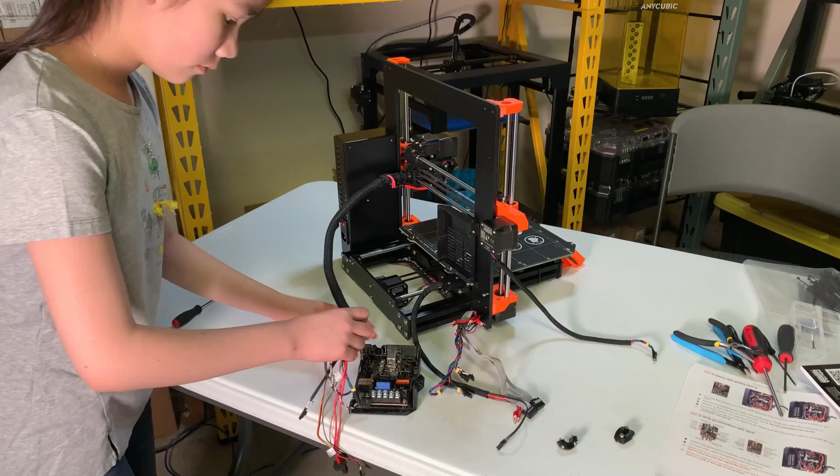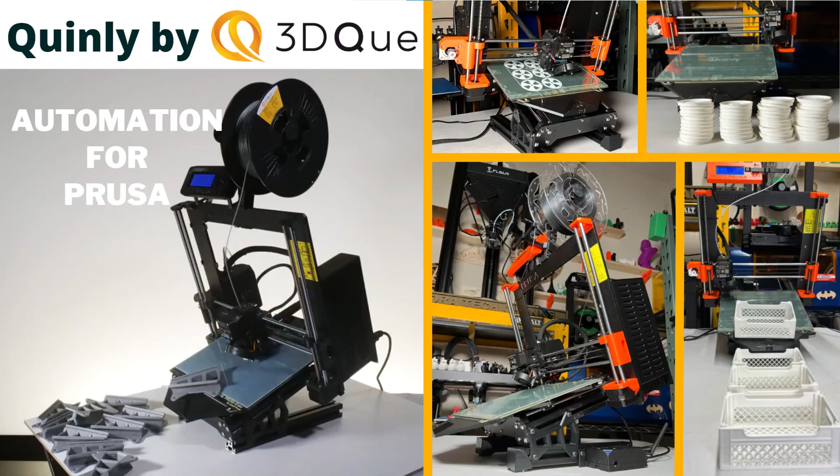About a year ago, I got my Prusa MK3S Plus, and since then, I haven't done any upgrades on the printer itself because of how well it prints. I only added a Raspberry Pi with OctoPi so that I could send prints directly from my computer.

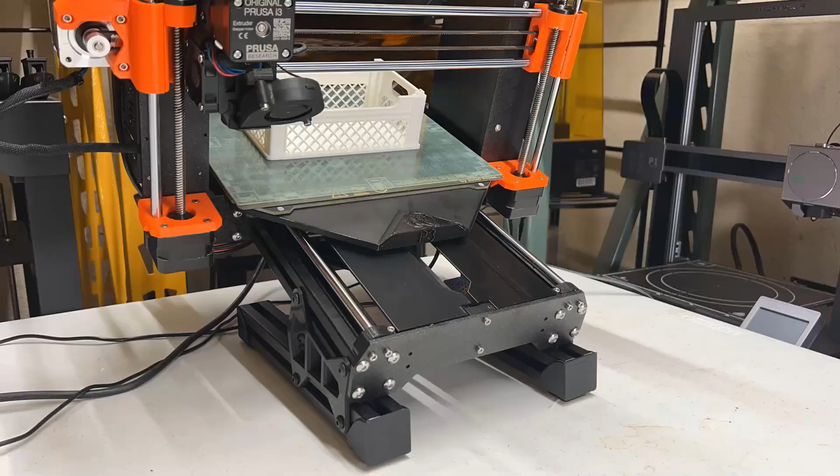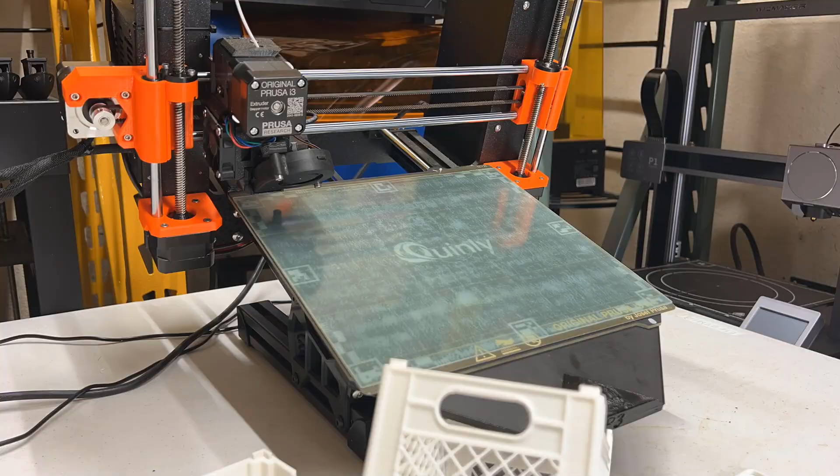Today, I will test out this Quinly Automation 3D Printing System kit from 3DQue on the Prusa MK3S series. This allows you to do batch printing, to eject parts when the print is finished, and to start a new one. You can control the print queue by changing the number of parts you need to print or adding more jobs to the queue. This kit also comes with an optional wireless hub in case you don't have a Raspberry Pi or you cannot get one in this chip shortage pandemic.

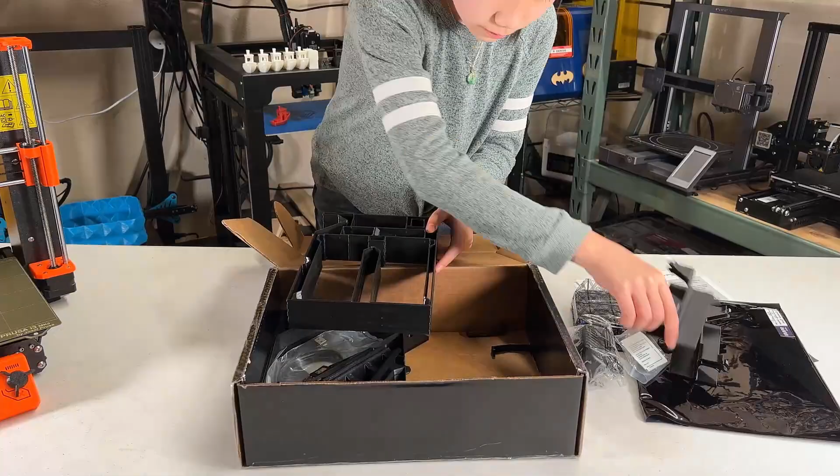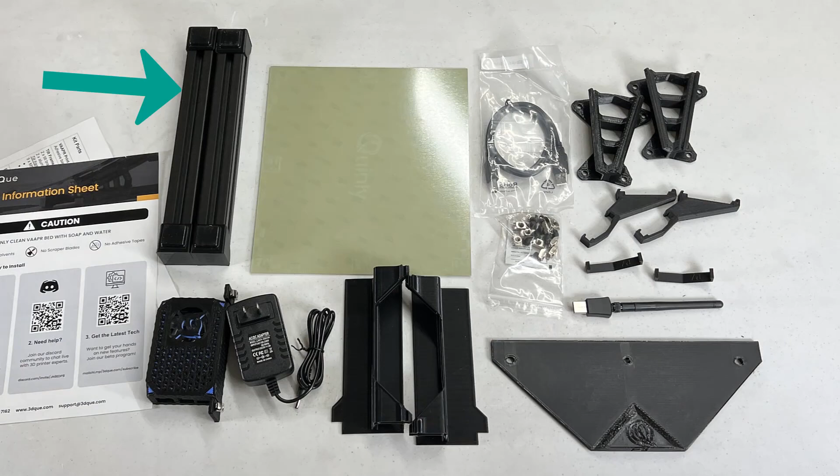We have two 30 by 30 aluminum extrusions, a VAAPR print surface, some 3D printed parts, a USB Wi-Fi adapter, the wireless hub, and the power supply.

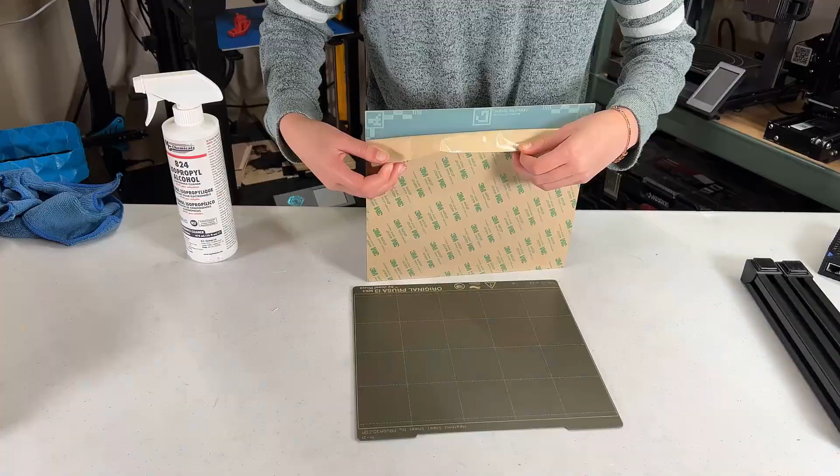First, I will clean my existing print surface as I need to stick the VAAPR print surface on top of it. However, don't use isopropyl alcohol on the VAAPR surface.

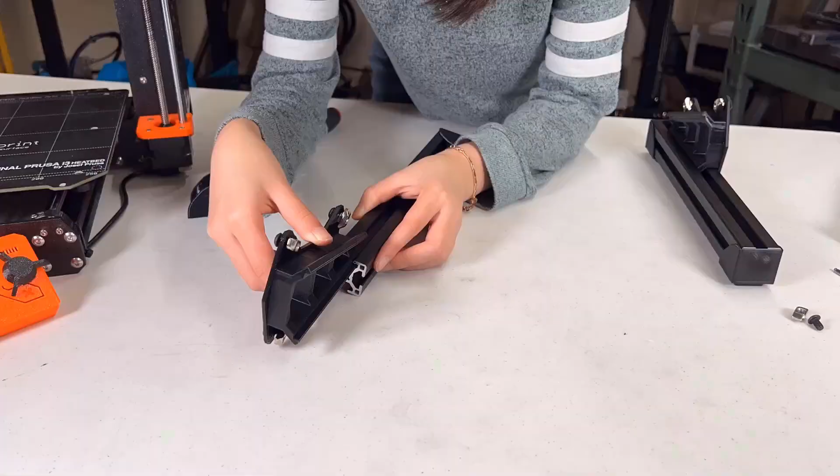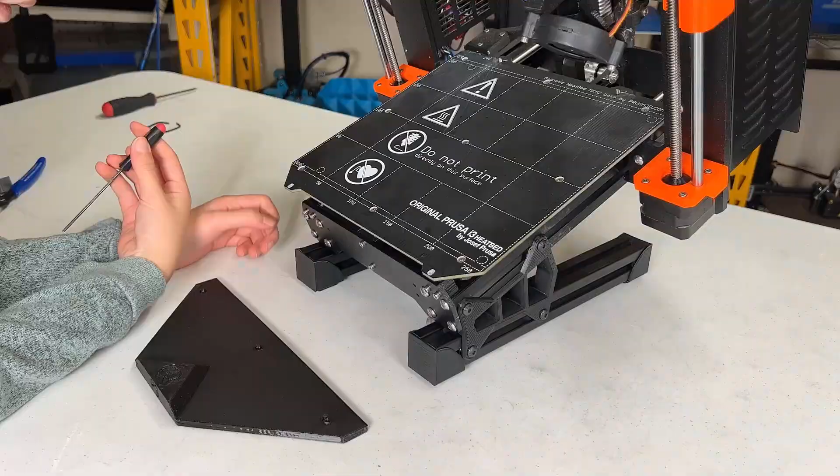Remove the filament holder and the LCD screen from the printer. Put the tilted mount on the extrusion and install one to each side so that your printer is now tilted. Install two covers to make sure no parts go underneath the heated bed. Add a slider using the spacer and screws of the heated bed.

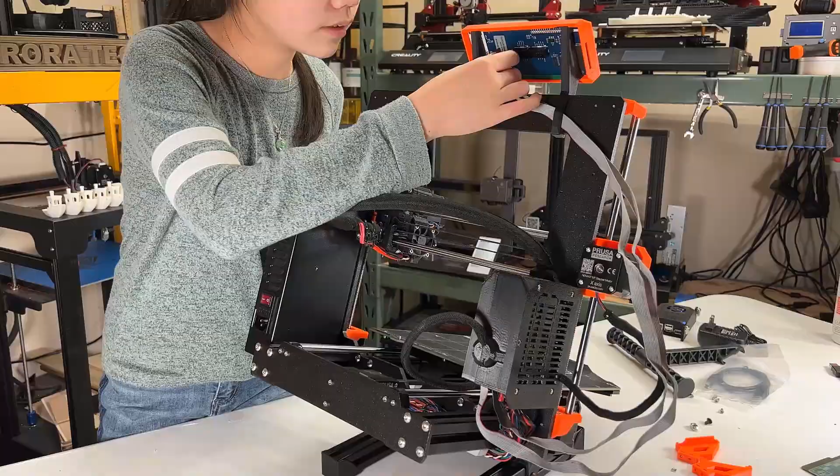Replace the support 3D printed parts of the LCD screen with the ones that came with this kit. Mount it on top of the frame, reconnect the cables, and use zip ties for some cable management.

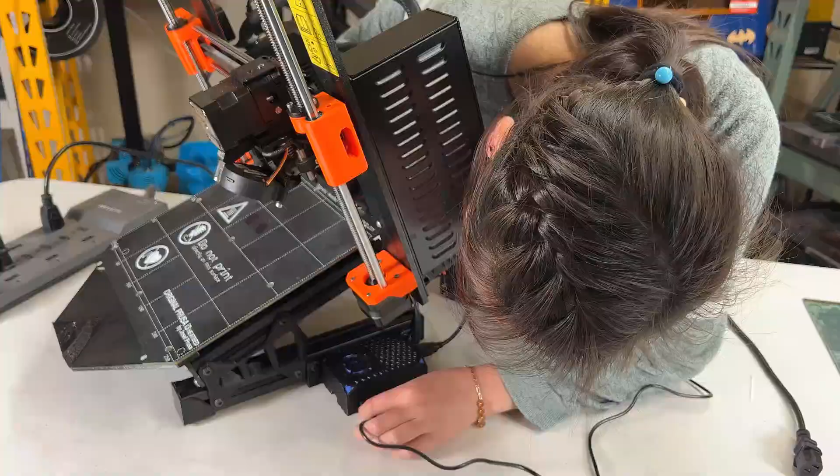Mount the wireless hub at the side of the printer and connect the USB cable from the hub to the printer. Connect the power cables, the USB webcam, and the USB Wi-Fi adapter, or if you have an Ethernet cable, using a wired network is always better. Now we can turn the printer on and the wireless hub on.

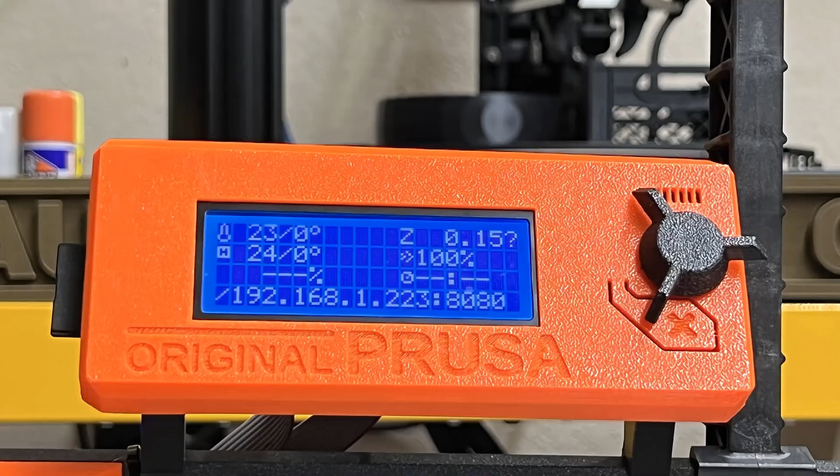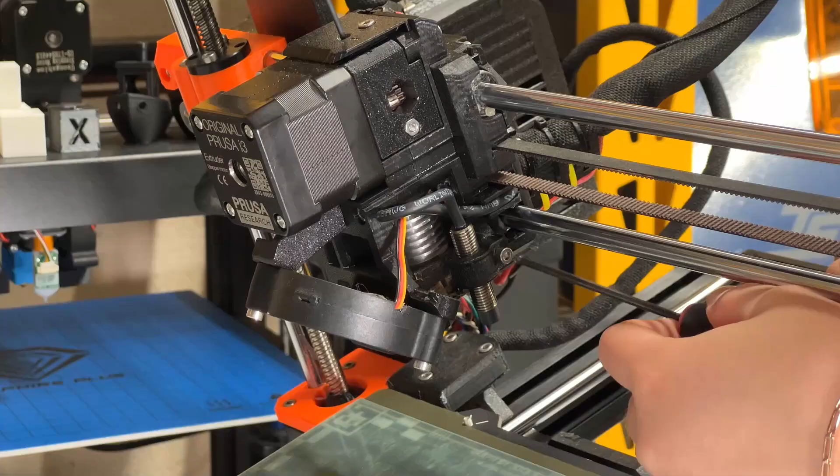After 8 to 10 minutes, the printer will show an IP address. We need to turn off two features in the settings menu: the crash detection and the Raspberry Pi port. We also need to adjust the Super Pinda sensor, making it 1 mm higher than the nozzle as recommended.

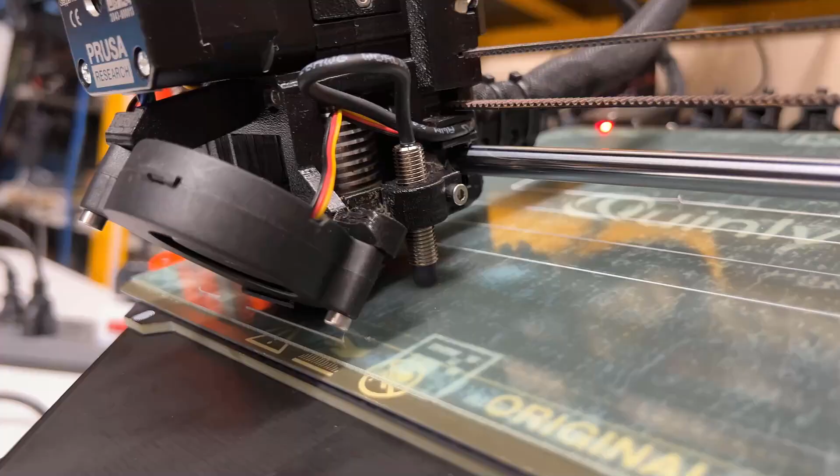Then redo the first layer calibration. Once you get the filament to stick to the print surface, we can go to the computer and make some changes to our slicer profile.

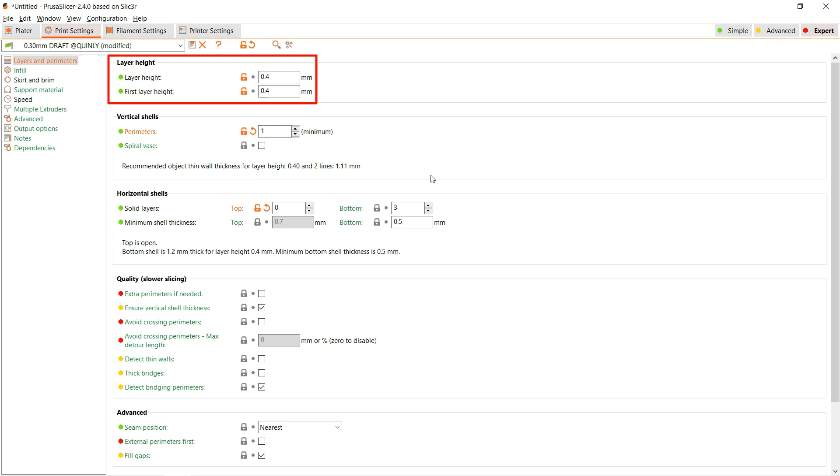First, for print settings, set a thicker first layer height, as we want a thicker first layer for better adhesion. For the layer height, you can just set it to your normal layer height like 0.2 or 0.3, but as I want to print faster for the test prints, I will just set it to 0.4.

I will add a few more loops to the skirt to clean up the nozzle, set the distance closer to the model we print, and set the height of the skirt to be taller so it can be removed easily along with the model. For filament settings, we need to increase the temperature by at least 10 degrees as the print surface is now thicker.

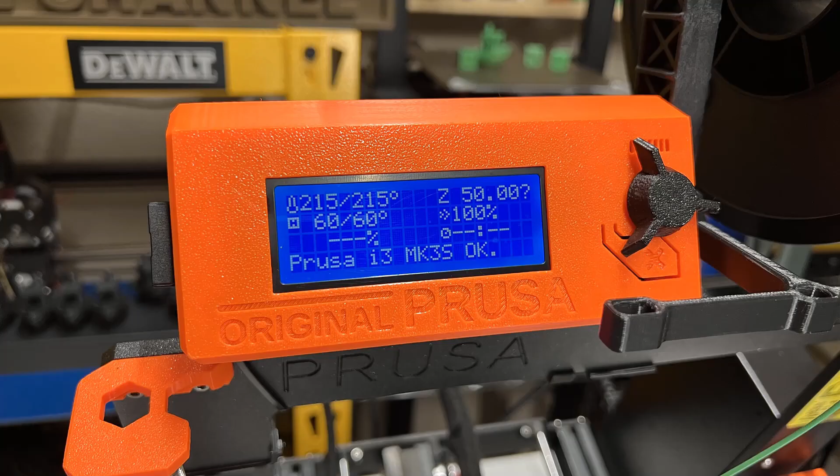The measurement from the thermistor under the bed closer to the heat source may not be the same as our print surface. For the printer settings, clear all the start and end G-code.

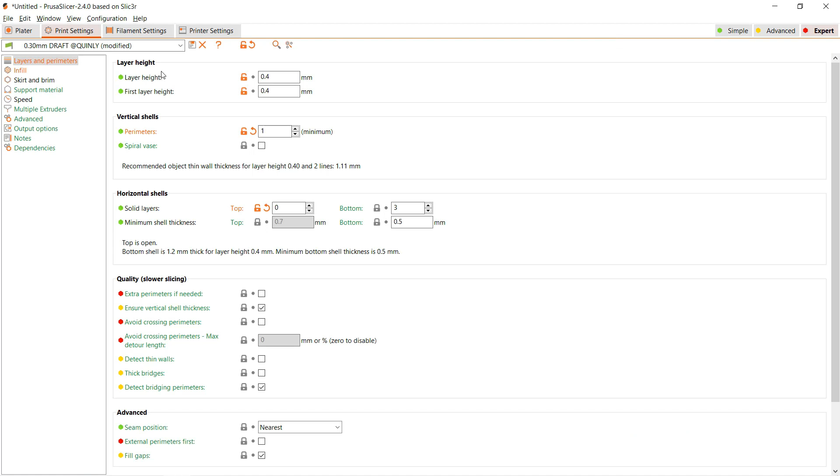Okay, that's all we need to change. Let's start with a simple cylinder. I will make it 20 mm tall and use vase mode to print the bottom and only one thin wall at the surface. Okay, export the G-code.

Open our browser and enter the IP address of the wireless hub. There are only 3 items in the navigation menu. The home is this page, which shows the current job, status, and the live stream of your webcam. The print queue is now empty, and the file manager is also empty.

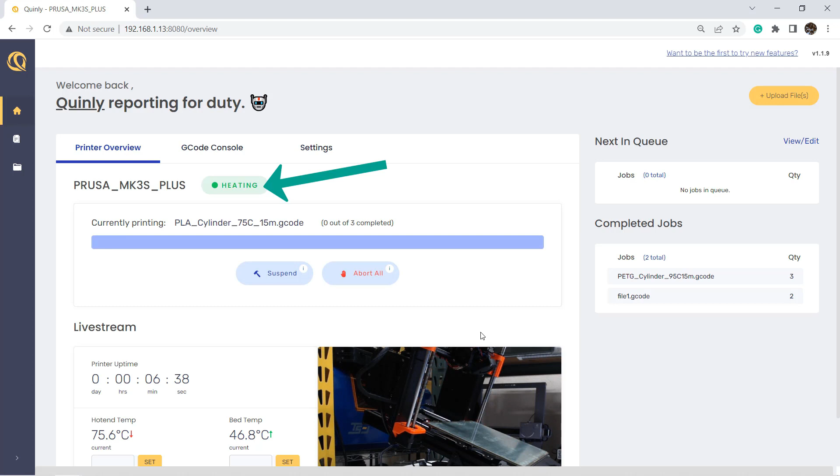Let's upload the file we need to print, wait a few seconds, and we can then add this file to the queue. Enter 3 as the quantity and 29 as the release temperature, and click Send to Queue. But since we have only one job, it has already been sent to the printer as the current print job, so we can't see it in the queue anymore. Let it heat up to the printing temperature, and it will start printing.

Now it's going to wait for the release temperature. It's showing resetting in the browser, and it won't do anything until the bed temperature drops below 29. Okay, it starts to release the part. The PLA cylinder will gently be pushed away.

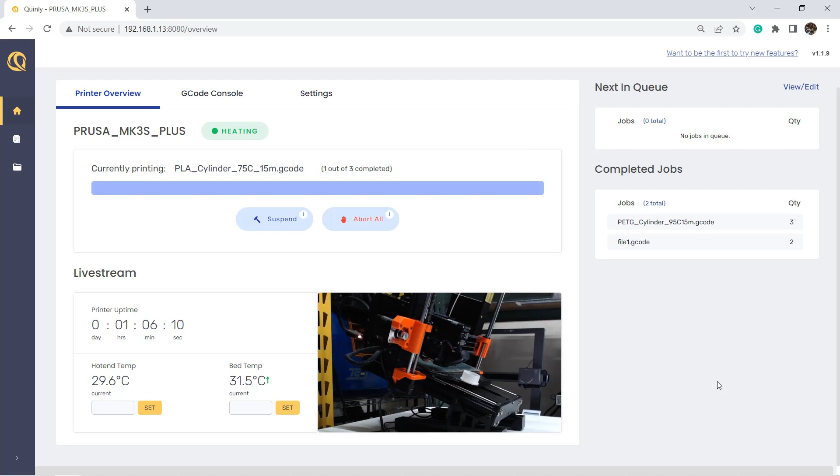Now the status has changed to heating, and the quantity 1 out of 3 is now completed. It is going to repeat this 2 more times to finish the job.

Now the status becomes idle as there's no other print job in the queue. Next, I will try to print the same cylinder with PETG.

For some reason, the skirt is staying on the bed, but maybe I can set the distance between it and the model to be closer so they will be pushed away together. Finally, 3 of them were printed successfully without problems.

However, when I tried to print the same model with ABS, I ran into some issues. The print is sticking well to the bed, but when it's trying to release, the print head just damages the body. I could say it's because the wall is too thin or the bottom sticks too well.

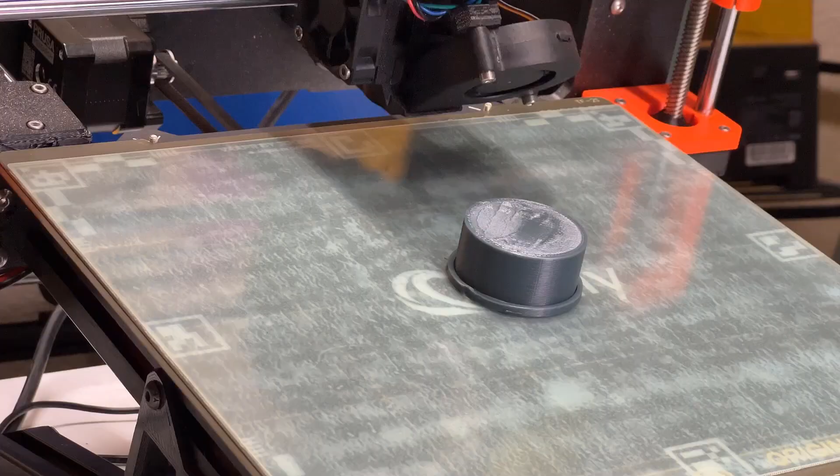So I reprinted the cylinder, but this time I used a 20% infill instead of a hollow body. Okay, now the print head is trying to release the model, it's sticking too well and the stepper motor keeps skipping. As you can see, the temperature dropped to 29 degrees after 40 minutes, but it still can't be released.

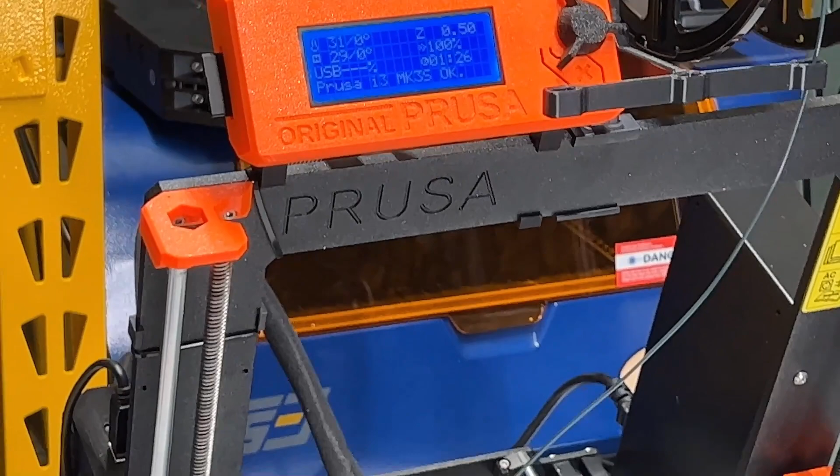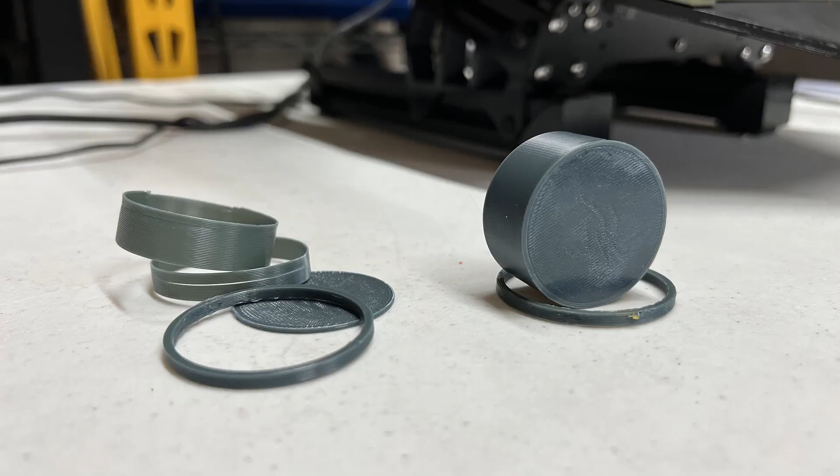I would say this FlashForge ABS filament sticks too well. This may be a good thing for normal use, but it does not work well with this print surface for auto part release. I have to flex the spring steel sheet manually, and some plastic remains on the surface.

Okay, besides using some cylinders to test this kit, I would like to print some of the real models I would normally print. Let's try this crate.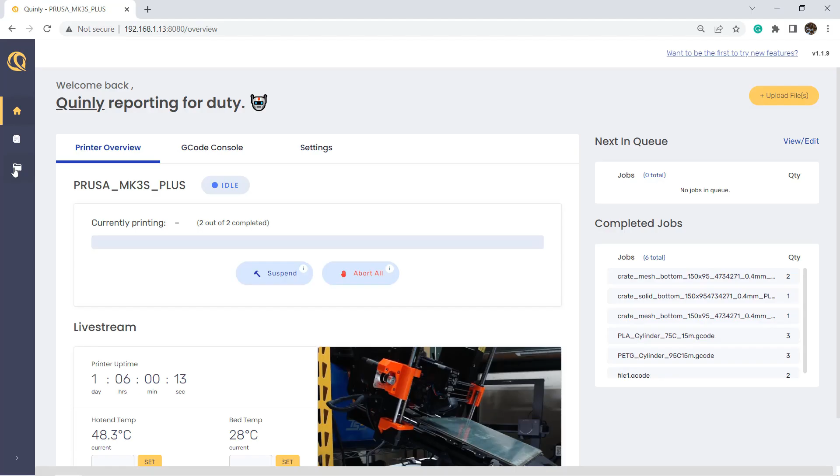I will slice one with a mesh bottom and one with a solid bottom. Upload both files to the wireless hub, add the mesh bottom one to the queue, and just print one copy using the default 29-degree release temperature. Add another solid bottom with the same settings, and finally, add another mesh bottom with 2 copies.

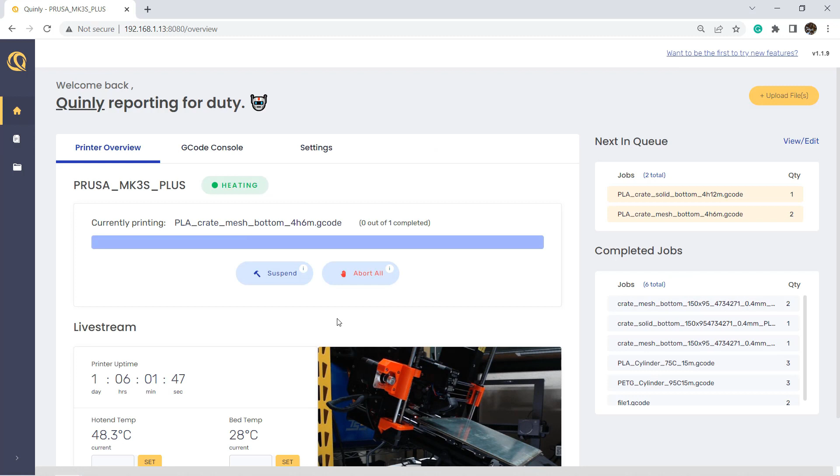Let's go to the queue. We can arrange the order by dragging the file or deleting it, but we can't change the quantity or release temperature. Okay, the first job is already starting. According to our queue, we will print 1 mesh bottom, 1 solid bottom, and 2 mesh bottoms.

After almost 18 hours, we have 4 pretty nice crates. Generally, printing both thin models and printing multiple models at a time is not recommended, but I will try both at the same time and see if the system can handle extreme situations.

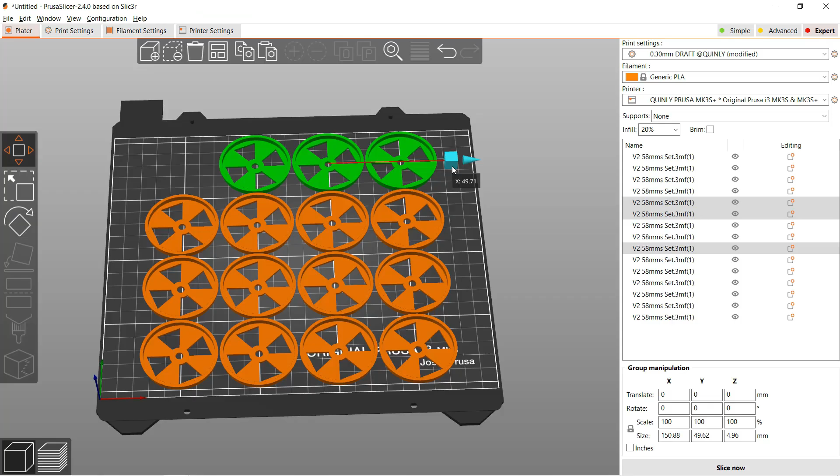According to the instructions, the top left corner should not be used as it may affect the print head when releasing the parts. I will move the objects to the right side of the bed, upload the file, and print 4 sets of these.

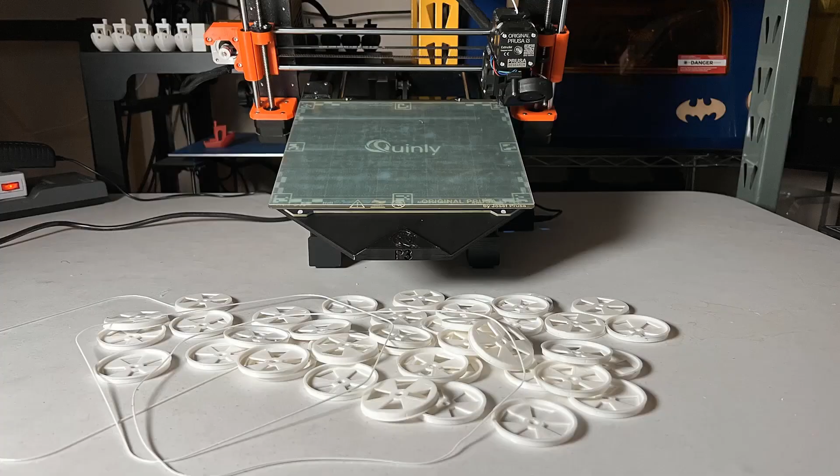For some reason, the third batch can't be released completely, and it triggered the Prusa Z-height calibration as the sensor can't probe the bed, and it is just stuck in this endless Z calibration loop. However, the rest of the prints look okay.

After using this kit for a week, I would like to share the pros and cons as well as some suggestions for 3DQue, starting with the pros.

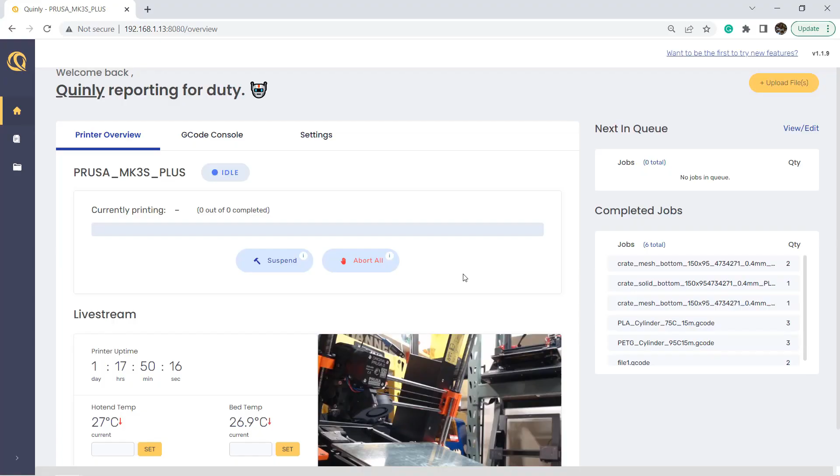As the main purpose of this kit is to do continuous printing, stability is very important. There were no major issues during my entire week of testing it. The software is quite stable, and most test prints are considered successful, except for the one I intentionally made more challenging and the ABS filament that stuck too well.

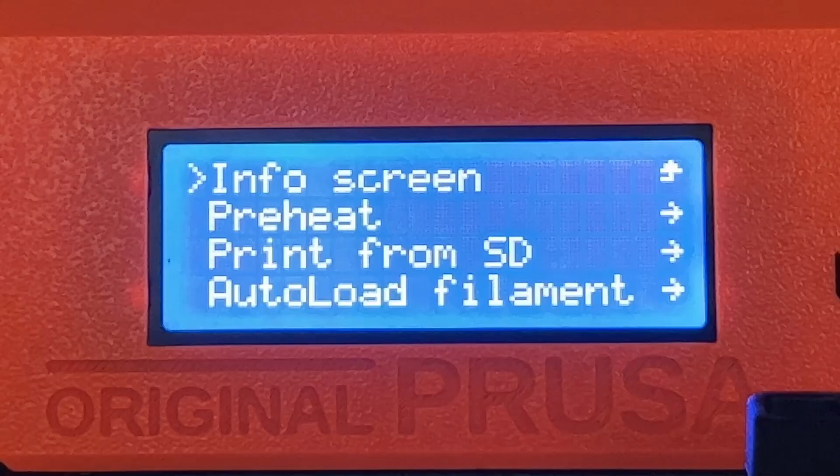The installation is straightforward, and the instructions manual is well written. With a few simple adjustments to your printer settings and slicer profile, you are ready to go.

It also supports almost any USB webcam. I tried all the other webcams I have. All three can be recognized by the wireless hub, although the live stream script has some glitches, and I will talk more about this later.

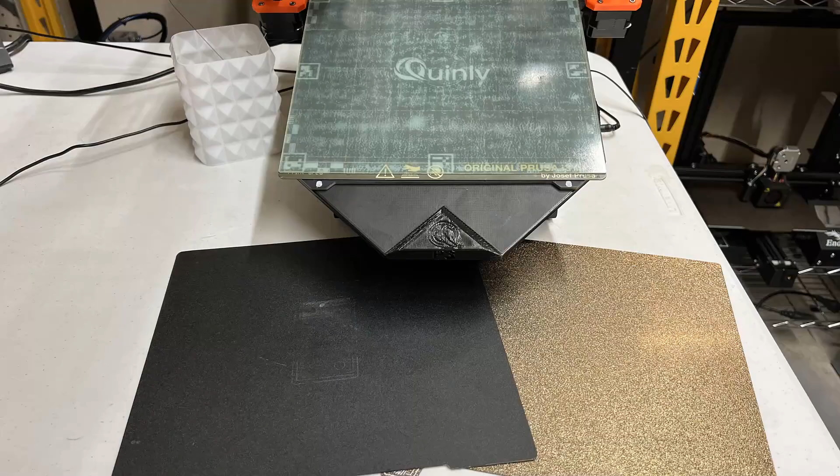Now for the cons. The print surface may not stick as well as a BuildTak type sticker sheet or a textured PEI print surface. It is similar to a smooth PEI surface, and it may not stick perfectly with all materials.

For me, I ended up with some materials that didn't stick well and some that stuck too well. I will further discuss this in the suggestions section.

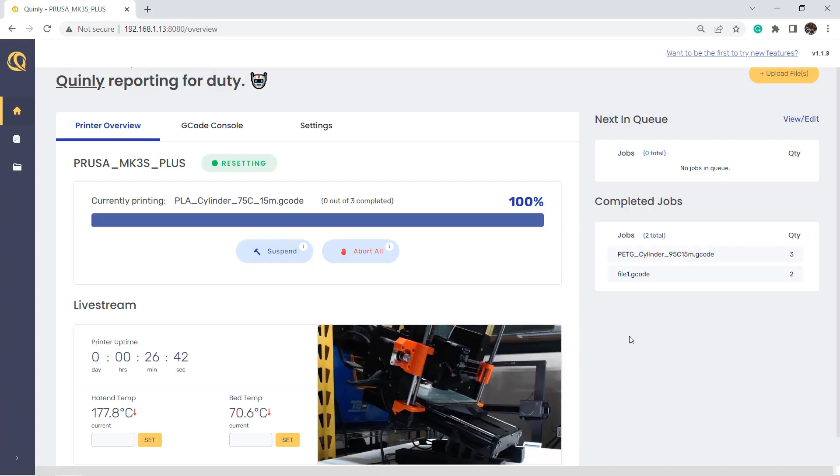The time required for the bed to cool down from the printing temperature to the release temperature can generally take 20 to 40 minutes, depending on the heated bed temperature, release temperature, and your room temperature. These factors affect the time between each print.

Of course, you can save some time by printing at a lower bed temperature like 60 or 65 and a higher release temperature. For some parts I printed with Creality white PLA, they could be released easily at 35 or even 40 degrees.

This can cut the waiting time to 15 minutes between each print. So if you're printing something really simple that only takes 20 minutes, it may not be the best idea to use this kit to print one at a time. However, if your print requires a few hours or longer, a 20 to 40 minute wait between each print may not be that big of a deal.

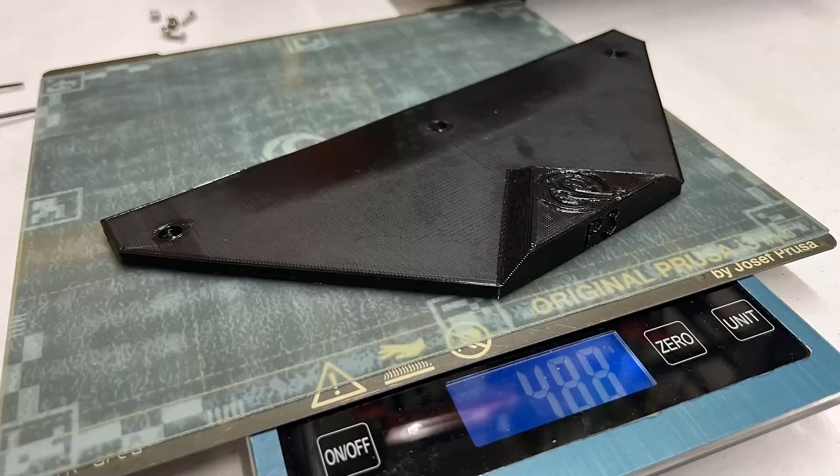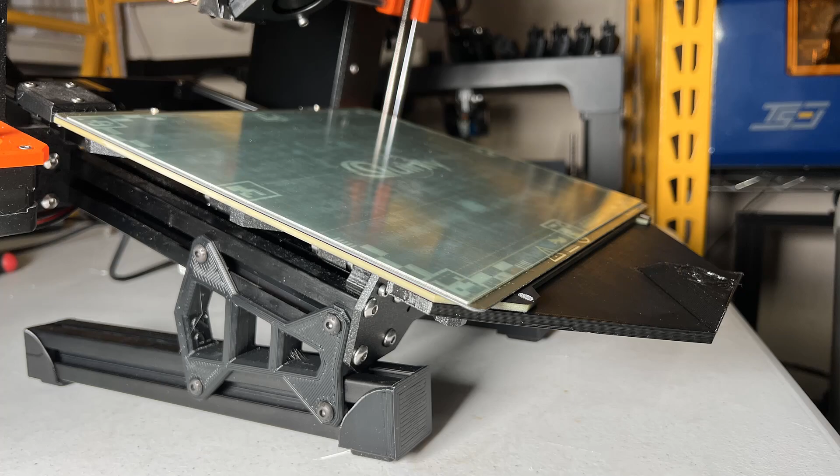Generally, we want the print bed of a Cartesian printer to be as lightweight as possible, as it swings back and forth. 3DQ could consider making a one-piece, thinner, lighter steel sheet with a thin print surface pre-applied on it, without using the stock spring steel PEI sheet. A longer steel sheet can also work as a slider, and this can reduce the total weight of the Y-axis.

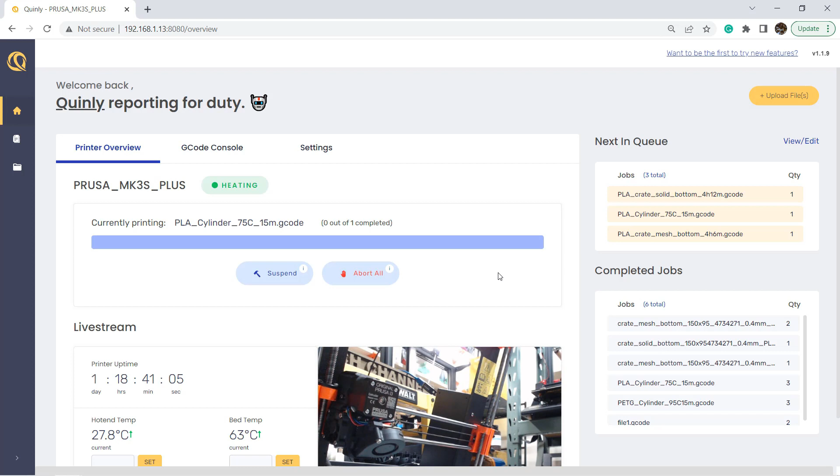For software, I would suggest that 3DQ allow users to change the release temperature and the number of copies for the current job, as well as jobs in the queue. The webcam live stream stability also needs to be improved. It freezes randomly, but refreshing the page manually brings it back to normal. I brought this up to 3DQ, and they said they will release an update to address this issue really soon.

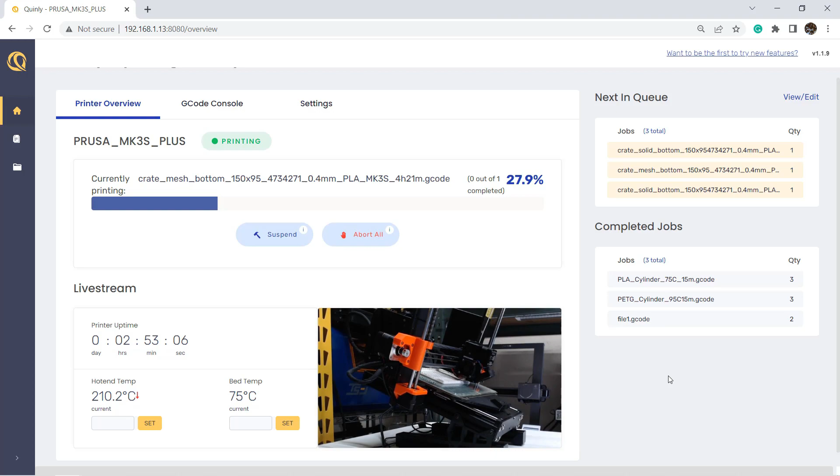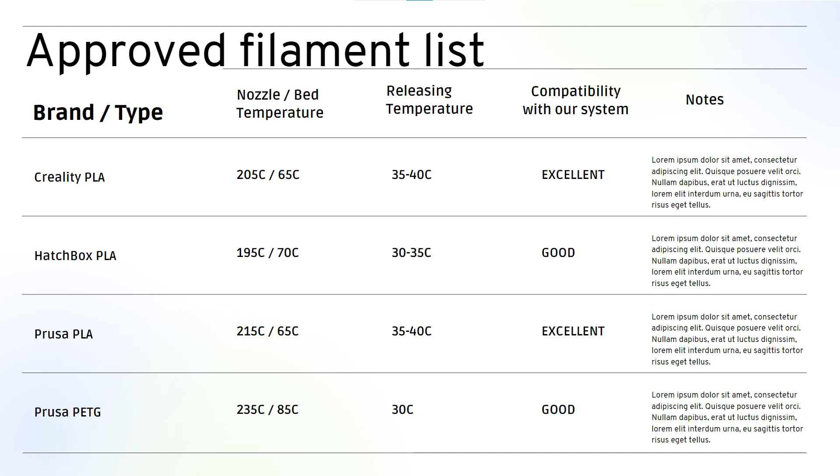I would also like to see 3DQ provide a list of approved filament brands that they tested to work well with this print surface, including detailed parameters like printing temperature, bed temperature, and release temperature. They could also include filament types that didn't work well, so we can avoid using them with the Quinly system.

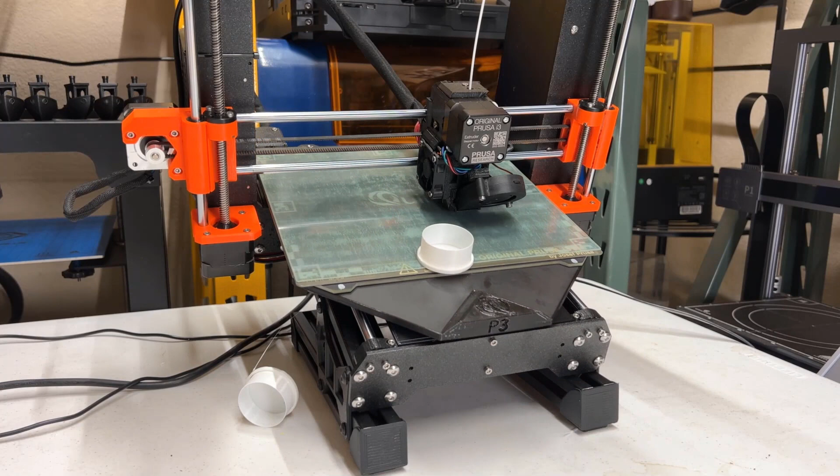In conclusion, this system adds an automation process to your 3D printer by adding G-code between each print that waits for the bed to cool down and moves the print head to knock off the print. It also allows you to manage your print jobs over the network.

Some people may ask why you would need this kit when you can add G-code manually to knock off the printed parts and loop the printing G-code to make the printer print continuously. I would say if you are a handy DIY maker who has the skills and has no problem editing all your G-code files with a text editor, then yes, you could do something very similar with no cost.

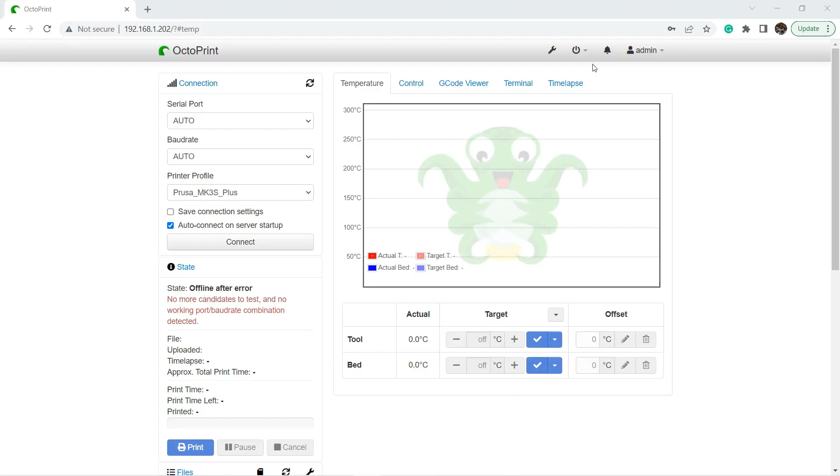You may also get a Raspberry Pi and install OctoPrint with the Continuous Print Queue plugin, which could also do the same thing for a lower cost.

However, if you are doing 3D printing production as a business, and you don't have the skill or time, or don't want to hire a dedicated person to take care of all of this, you may need a complete package that includes software, hardware, and the parts you need to modify the printer, as well as being provided with technical support when you need it. If all this sounds good to you, the Quinly automation system is something you may want to consider.

Besides the Prusa MK3S series, 3DQ also has kits available for other printers, like the Ender 3, which come at a more affordable price. I put a link to their website down below.